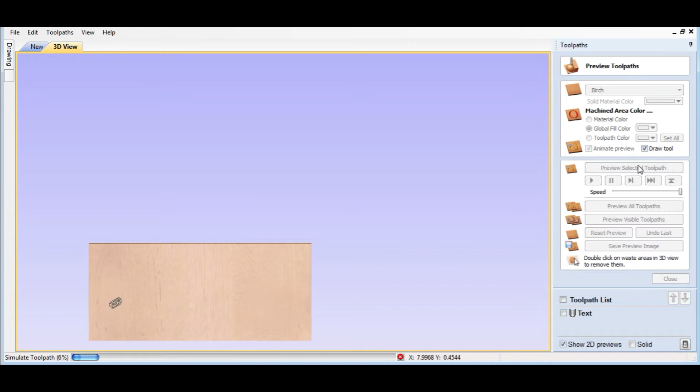Ooh, no, that's no good. So let's change that from a 1/4 inch ball nose to an 1/8 inch ball nose. Recalculate it, we're going to reset the preview. That looks a lot better.

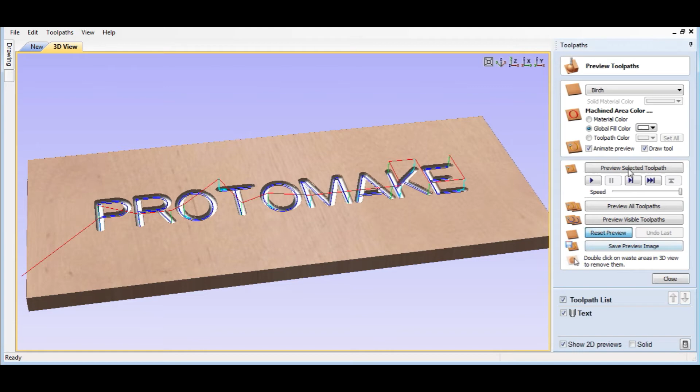Although I think the depth is maybe too far now, so we're going to edit that again. If we're using an 1/8 inch, let's go maybe just 0.5, so we're not going in too deep. There we go.

Now we're going to go and use profile again to cut the part out, and we'll go 2.5, and we'll switch this to an 1/8 inch. Let's see what we got. 1/8 inch plywood—this is actually going to be Poplar, but the feeds and speeds are close enough.

We're going to go outside right so that it cuts to the outside of this line versus inside or on it. And we'll rename this outside route.

This one we definitely want tabs so that it doesn't fall out. Let's go a little thicker. We're going to do 3D tabs, and let's do 4 tabs. Hit close.

We're going to add leads, so it's going to lead in and lead back out. This will prevent marring when the z-axis is coming up and down. And we're going to add another ramp, because generally end mills don't like to plunge. And we're going to hit calculate.

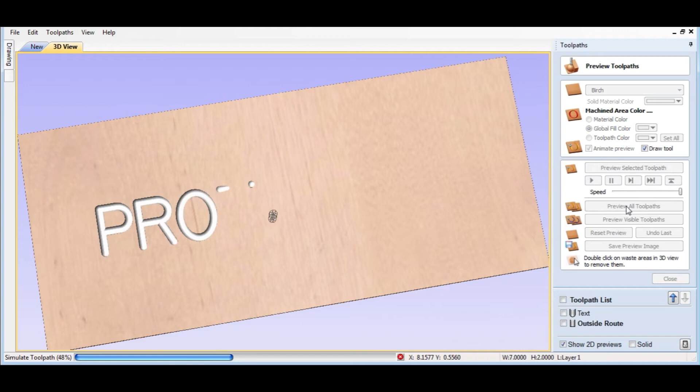And we'll preview that out. So we have a tab here, here, and here, but the first tab actually got cut out by the lead in, lead out. So let's go back, edit tabs, and maybe move that first one a little further up. There, now we have 4 tabs.

That's kind of boring, actually. How about we duplicate this text toolpath and then edit it, select the outside border, and we're going to cut to a depth of 0.04. And we'll put a nice rounded edge.

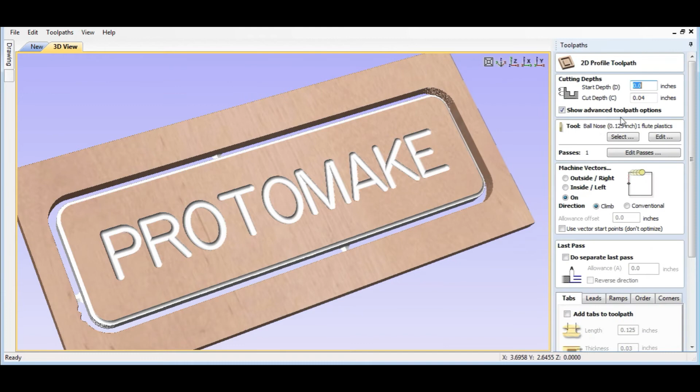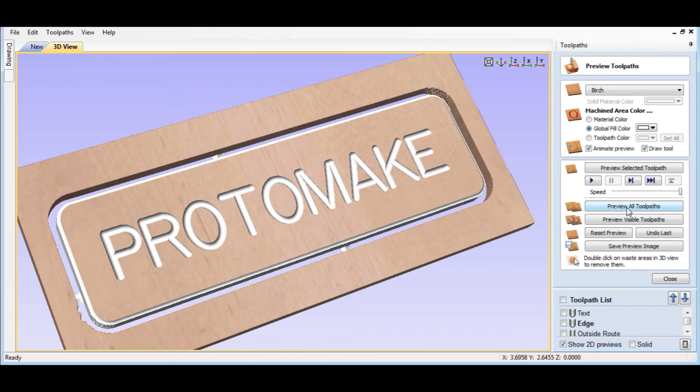Actually, I think maybe not go quite that deep. Let's reset and preview all the toolpaths again. Okay, that looks good.

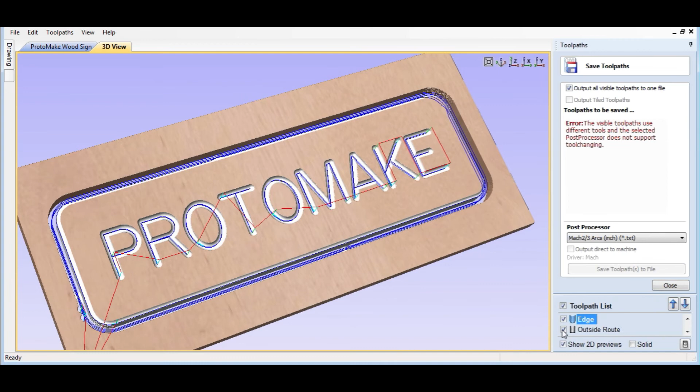Let's save it. And now all we have to do is output the toolpaths. So we're going to select all the same tool, save that, text and edge op1, and then we'll do a manual tool change and do the outside route.